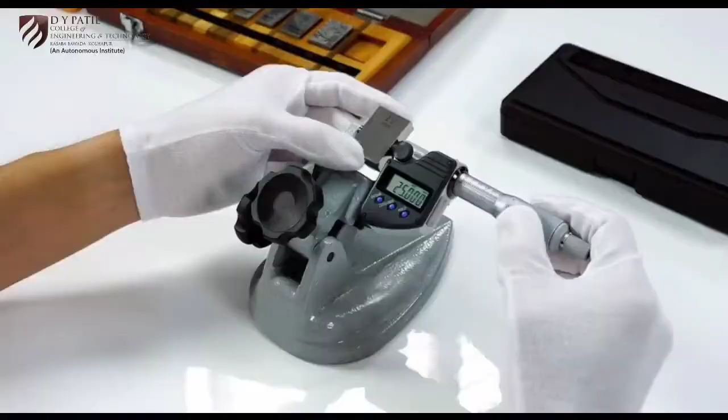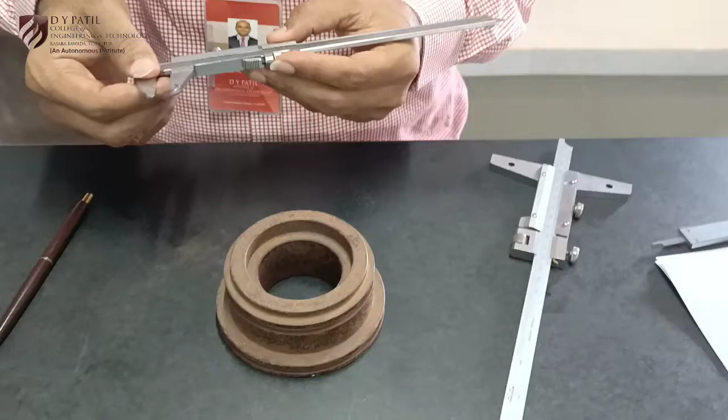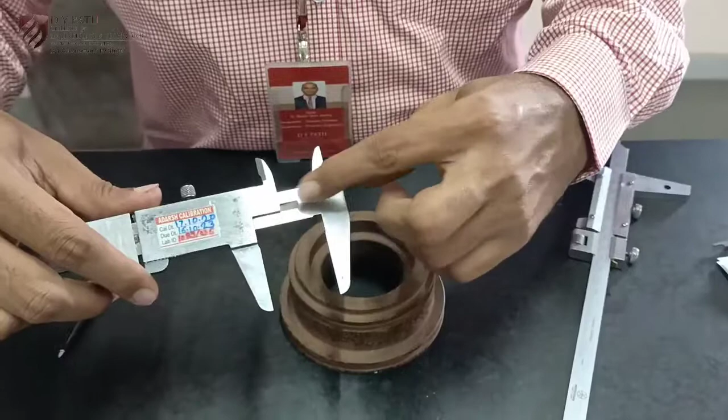As I mentioned, this vernier can be used for three types of measurement: outside, inside and depth. One more type of measurement is also possible with this rear side, meaning we can measure some steps like this, but that is rarely used.

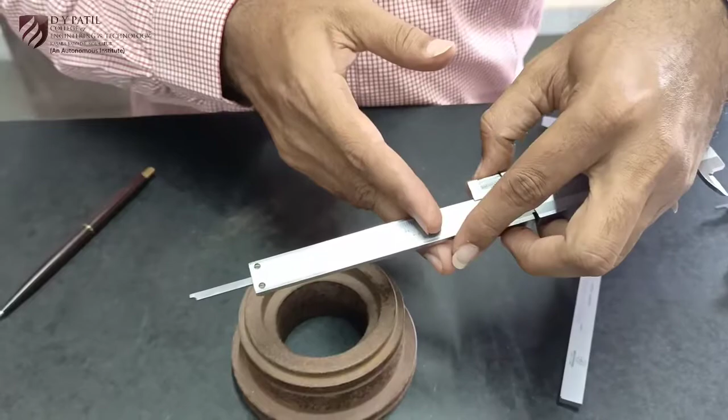In case of depth measurement, the blade also has certain limitations. For example, this can basically check depth dimensions very close to the wall thickness, or suppose a component has some steps like this, it is very difficult to use this vernier caliper for measurement of depth. That's why a special purpose vernier is designed, known as a vernier depth gauge.

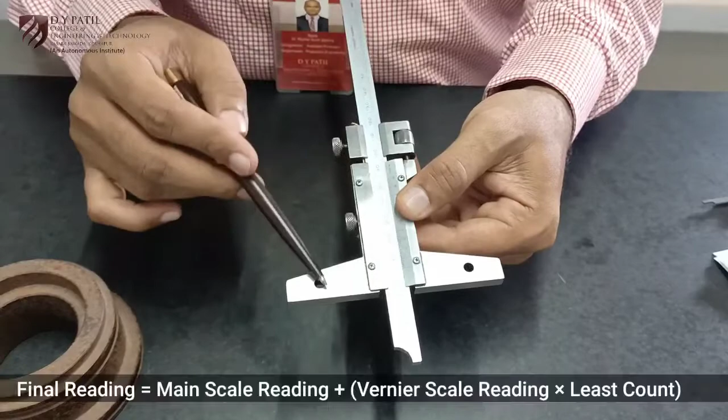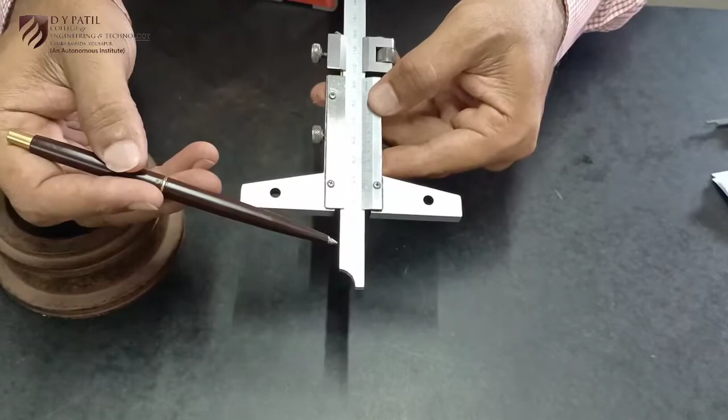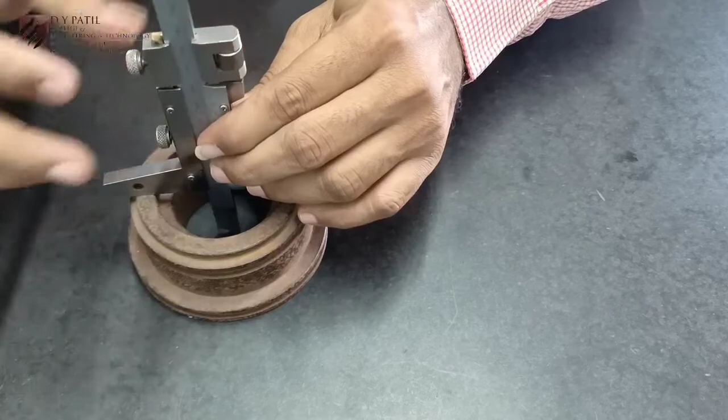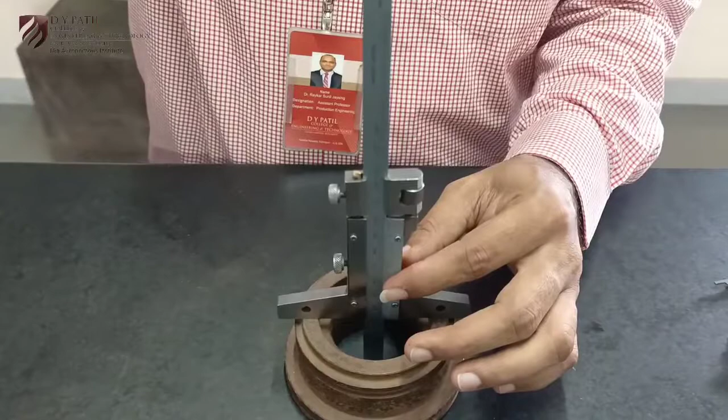While using this, again we have to do the same arrangement: release this blade inside the component like this, then lock it, do fine adjustment if needed, and lock it. In most vernier depth gauges we do not need this fine adjustment, because when we release the blade like this, by default it will go and rest on the lower side of the component. So if I rest the depth gauge over here, I will release this so it touches the component, and then I will lock this.

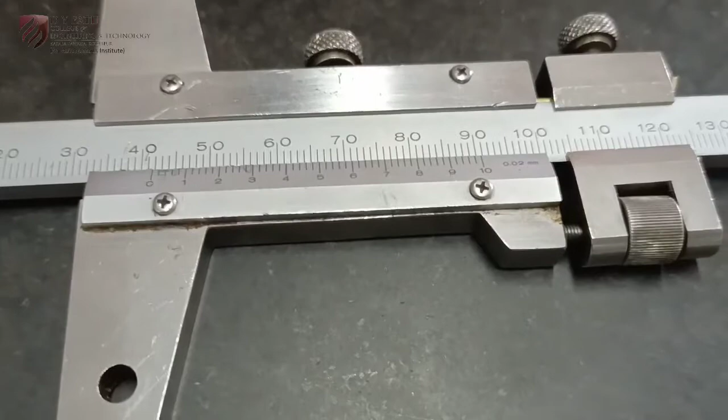If I take it out, you have to read it in the same way as that of a vernier caliper. So if I observe the main scale, it starts with 0 again in the same way. Division number 41 has been crossed by 0, so my main scale reading is 41.

And if I observe this vernier scale, division number 7, which is mentioned as 7, is matching, that is from 0 to 7. In the span of 5 there are 35 divisions, that is 5, 10, 15, likewise up to 35. So main scale reading is 41 and division number 35 is matching with the main scale. So 35 multiplied by 0.02 gives 0.70. So total reading is 41.70 mm.

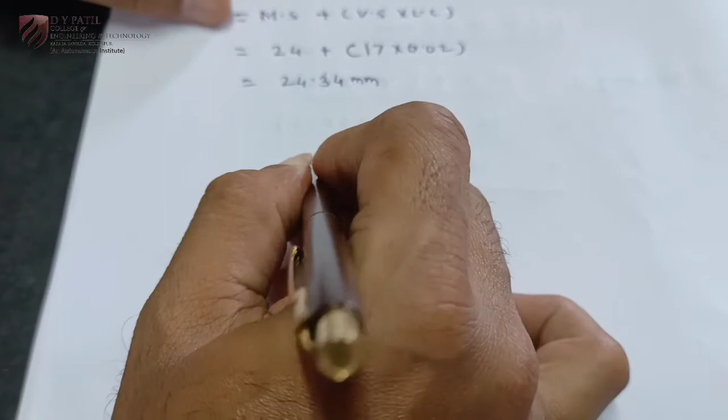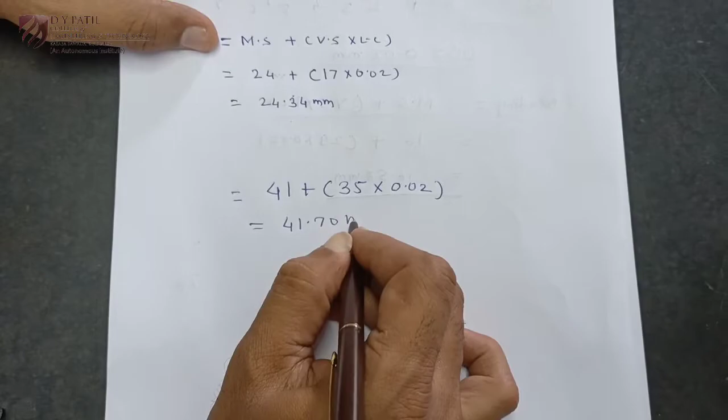If I just check this, you can see it like this. So main scale reading is 41, plus the 35th division is matching, and least count is 0.02. So 41.70 mm is the final reading of this.

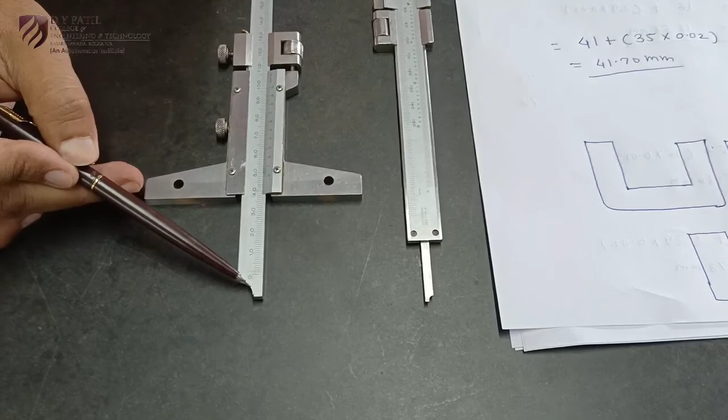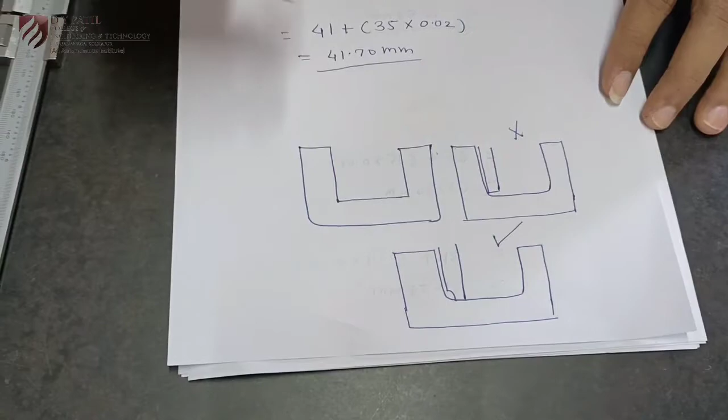If you see the blades of the depth vernier and even the depth measuring blade of this vernier caliper, they have a typical curved shape, which is provided for a basic purpose. For example, in this sketch, when we manufacture the component and create sharp corners like this, there is a possibility that stress concentration will occur, and that's why most sharp corners are provided with a fillet like this.

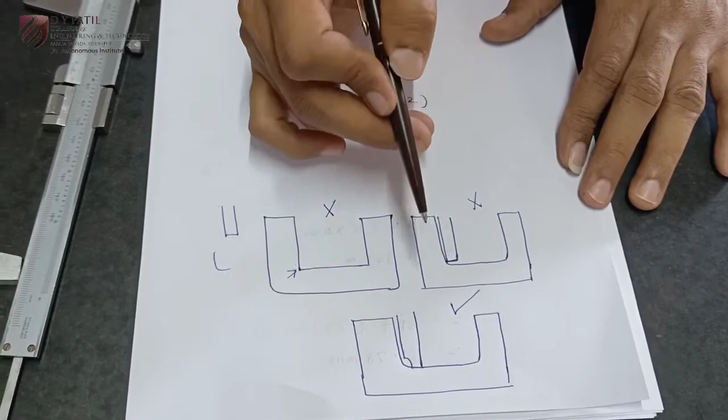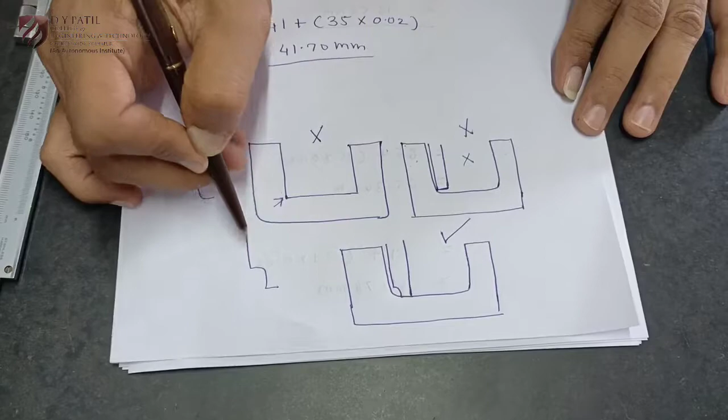And if I have a blade like this for depth measurement, what will happen? This blade will touch the component at this particular point, typically when we need to measure the depth close to the wall thickness. So this will not give a correct reading. Because of this, a curved shape is provided for almost all depth measuring blades, so that it touches the component at the correct place.